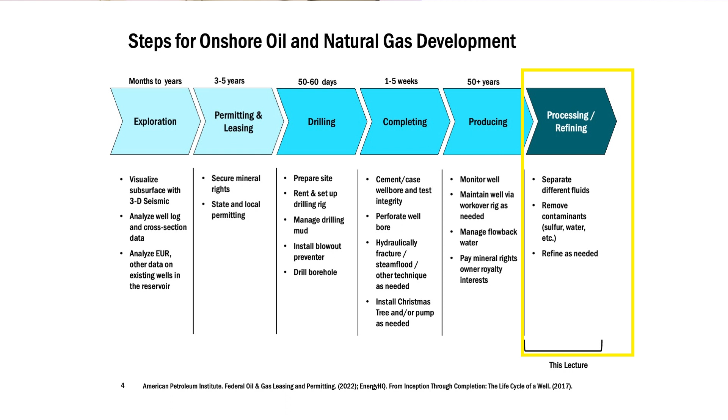You've seen this chart before, just to contextualize where we are today in this lecture - we're all the way down at the end. We're talking about now we've gotten the oil out of the ground - what do we do with it? How do we get it to the refineries? And how do we make it into the fuels that we use, especially in our transportation sector?

So a little bit of summary of things we're going to talk about today. We're going to talk about crude oil - it's not all the same, so I'll give you a sense of what the differences are, what terminology we use when we talk about crude oil. We're going to talk about trade and moving it around - we move a lot of oil around. It is one of the resources that is very much a global commodity, so we have global prices on oil, a lot of factors that go into our global prices and our global markets for oil, and so we'll talk about that.

But big picture, we move a lot of it around, and much of that transport is on water - we're moving it across oceans as we move our oil around. It doesn't come out of the ground in a very useful form, so we're going to talk about refining. The products that we primarily make in the US are gasoline - that's not true everywhere, so we'll talk about some of the differences in the products. Why do we use oil for transportation? It is a very high energy density, both from a volume standpoint and a mass standpoint.

When you're going to carry your fuel around with you like you do with transportation, energy density is important. This is why oil has really dominated our transportation fuel sector. It makes it very hard to dethrone, to move to something else.

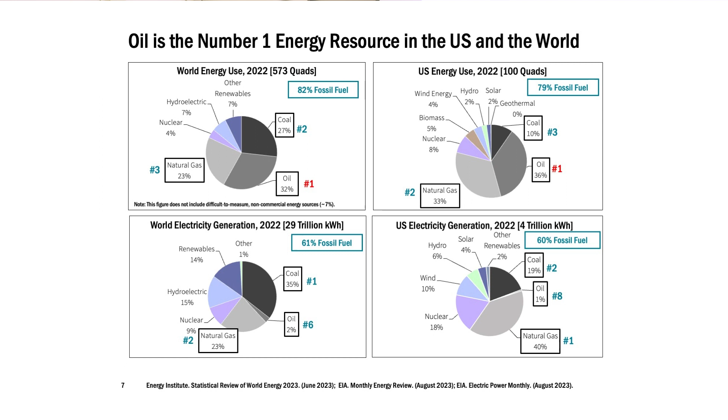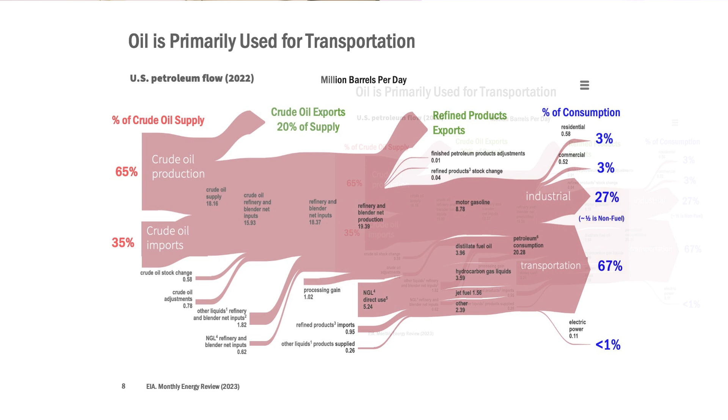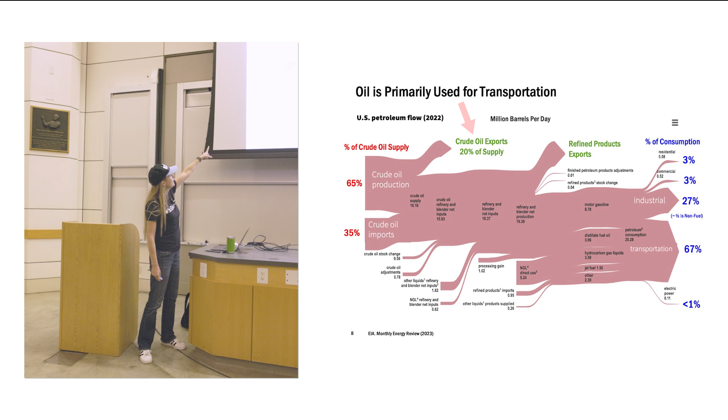First, looking at where we get our oil from, so our crude oil supply. We're going to talk more about this, but this picture has really changed with the horizontal drilling and hydraulic fracturing revolution. We used to import more like three-quarters of our oil, and now we're only importing about a third of our oil. And not only that, we're exporting quite a bit of oil.

We originally, for a long time, were not able to export crude oil—it wasn't allowed by our federal government. That changed in 2015. It was kind of like a deal when we were expanding some of the subsidies on renewables. The way some of the Democrats got the Republican Party to support that was to allow exporting of crude oil. For a long time it wasn't allowed because of energy security—this idea that we should keep our oil within our borders. But now we allow crude oil exports.

We've always allowed refined product exports, so that means things that are coming out after we've already made the gasoline or diesel—we export that. And those two wedges are actually bigger than our crude oil import wedge. So in just the last three years, we have become a net exporter of oil, crude oil plus products. It's a new landscape for the US. But you can see we also still use quite a bit of it here—just much more crude oil production is coming domestically than from foreign sources.

Then I want to show you the end, right? So three-quarters of it, or two-thirds of it, is really going to transportation. And then that industrial piece, which is almost another 30%, about half of that is fueling the refineries that are making the transportation fuels. So a big wedge is going to transportation, other industrial parts used for heating and some other processes, and it's also used for non-fuel purposes—oil goes into plastics and other commodities, so chemicals as well.

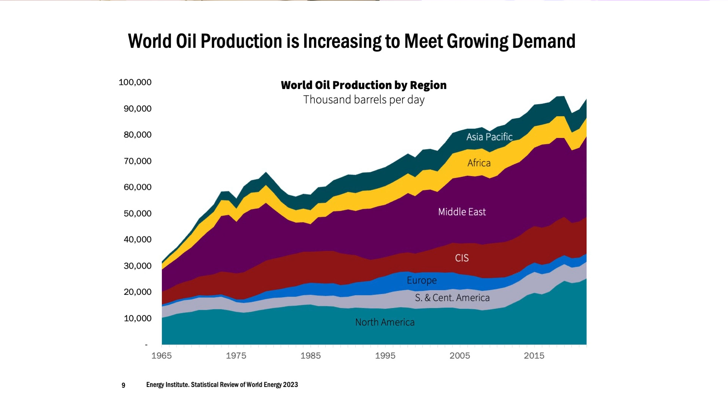This chart's not going to surprise you: world oil production is growing, and it's growing as demand grows. So where are those growth areas in production? You can see in this chart how production really took off in North America and the US with the horizontal drilling, hydraulic fracturing revolution. The Middle East very much dominates oil production, and there's not a lot of growth in other areas for production. So those are the two big regions of oil production today.

I would say projects in Alaska have a long history of controversy. ANWR is a reserve there. There's been a lot of pushback. There's a big oil reserve there. It's a very environmentally sensitive area, and it's actually a very challenging area to produce oil.

The Willow Project has some of those same challenges. Although this is now leased, there's still a question of whether it will actually be produced, and that depends a lot on oil demand and oil price. It's a little bit more challenging area, and that impacts the profit margins for producing from this site.

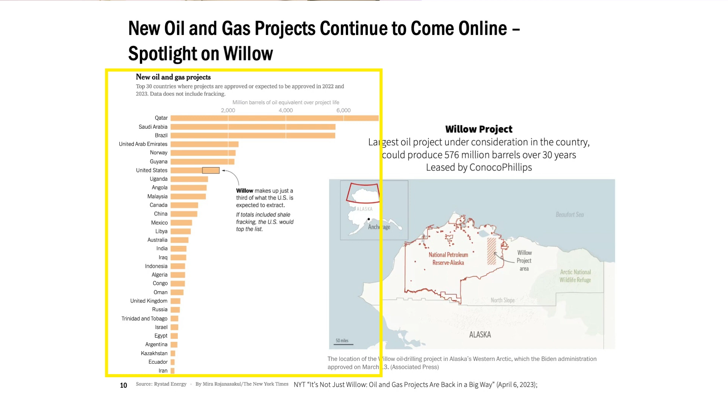So we've gone after more of those plays. It's a very different environment than it is in a lot of other countries. In the US, it is very much market-driven, commercial-driven. There's private ownership of minerals, and so there's a lot of incentive to go after those minerals with private mineral rights. In much of the rest of the world, those mineral rights are owned by the government, making it much more of a government-controlled industry than here in the US.

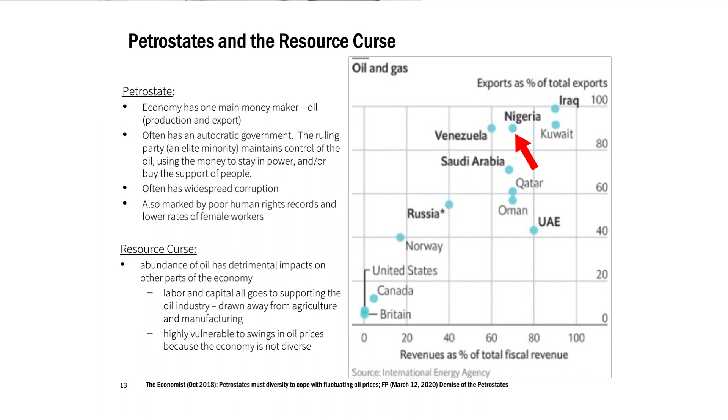This chart shows revenues in terms of exports, and it reveals that Nigeria is very dependent on oil exports for much of the country's revenue. A lot of that doesn't trickle down to the populace; it supports a wealthy few. This can be a challenge in terms of how equitable a society is, given this resource curse idea.

This is coming up a lot with oil companies that have operated in places like Nigeria, like Shell. This is a recent example in the news: they're trying to sell off their more polluting oil sites to reduce their carbon footprint. In Nigeria there's often a lot of flaring and oil leaks, so it tends to be a very polluting place for these multinationals to work.

Shell, for example, has sold off much of its assets in Nigeria to local producers. The unintended consequence is that these local producers don't have the money or resources to clean up, so the pollution has actually gotten worse. This is another impact of our use of oil as a fossil fuel.

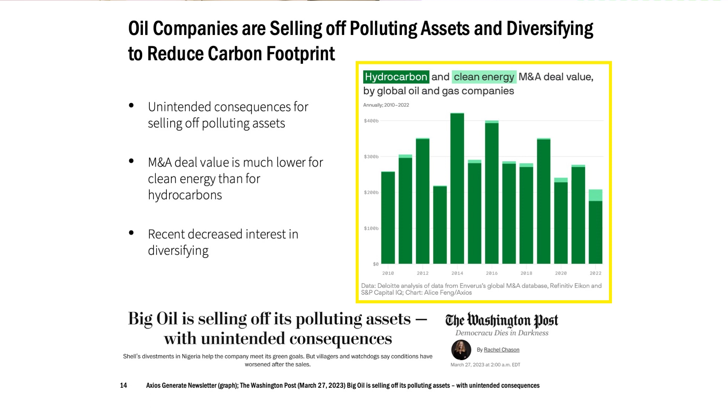The other thing going on, at least talked about with a lot of the big oil company multinationals, is this idea that they're investing in clean energy, trying to diversify and reduce their carbon footprint. This chart shows that it's still nowhere near the investment they're putting into their oil and gas assets. It's not surprising—that is what they are. They might talk about being energy companies, but they're really oil and gas companies. As long as we have demand for these products, they're going to see that's where a lot of the profits lie, where their expertise lies, and where a lot of their investment is going.

I wanted to bring up another complexity of oil before we get into the technology: oil's impact on climate change, and the attention some oil companies—ExxonMobil in particular—have gotten over the idea that they've known about climate change for a long time and tried to downplay it. New York State has done a lot of investigation into this. California has just recently sued oil companies, ExxonMobil being one of a whole list, with evidence that they've known about climate change for a long time and tried to downplay it so they could continue their oil business.

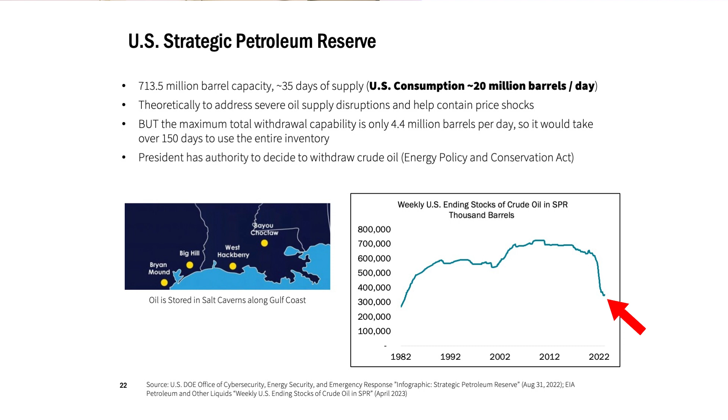And so we do see different federal administrations sometimes fill it up when the oil is cheap, and then they sell it when the oil is expensive. So it does work as kind of an arbitrage way of making some money off of that oil stored in these caverns. So you can see it's kind of at a lowish point in terms of how much we have in our Strategic Petroleum Reserve right now. Questions on that before we get into moving it around and how we make it into fuel?

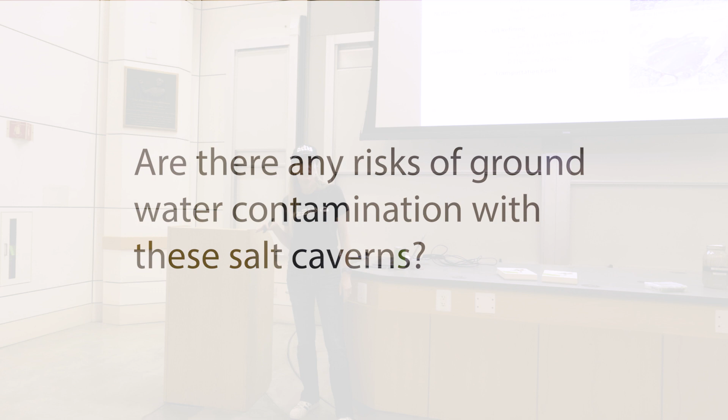Are there any risks of groundwater contamination with these salt caverns? I would say there's always risk. Salt caverns tend to be pretty airtight, but they have to be monitored because there's always risks of seepage or something like that. The biggest challenge we had with the salt caverns in the facility I was at, where we actually just stored salt water to make chlorine, is it mixing with other things stored in the neighboring caverns. You could sometimes get leakage across the caverns because you don't always store the same thing in one cavern. Sometimes you change out what you're storing there.

Are there any concerns of the oil getting contaminated within the salt cavern? No, it isn't a huge concern. You're going to refine that oil as you take it back out and process it. So the little bit of salt that might get in there isn't something they worry about.

Let's talk about oil sands and tar sands, and then we'll talk about moving oil around. So you've already heard a lot about how we drill and produce conventional oil or unconventional oil that's in oil shale, stuff that's liquid at room temperature. Much of the oil that's produced in Canada, for example, is oil sands or tar sands.

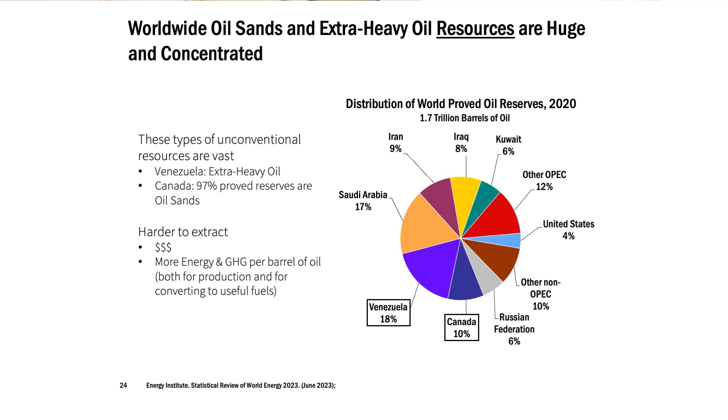Okay, so where is a lot of our heavy and oil sands and extra heavy oil resources? Much of them are in Venezuela and Canada. You know, a couple decades ago, they wouldn't even be considered proved oil reserves because if the oil price goes low enough, it's not cost effective to produce that oil because of all the extra stuff you have to do to it. California oil also can fall into this category.

There's two ways to get it out. Open pit mining, which is really you just clear the land, you clear the topsoil, you start digging out the sand and the oil that's mixed together. Then you got to heat it up to try to separate those things, and then you got to heat it up enough to make it into like a synthetic crude that you can at least pump somewhere or keep heated as you're pumping. So in that process, usually they use natural gas to provide a lot of the heat, so they have to pipe in natural gas to heat up that oil to make it into the Syncrude so they can move it around.

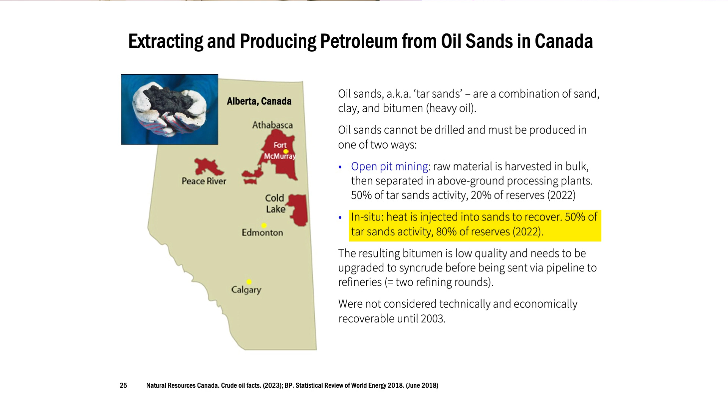In situ is where you're injecting the heat directly into the sands and trying to make it flow there, and then you pump it out kind of like you do with conventional oil because you've already heated it up. That's kind of what we do here in California with the heavy oil resources. We're putting steam into the ground, heating it up so it'll flow, and then we pump it out like conventional oil.

It's causing a lot of environmental challenges in terms of oil sands. So as you can imagine, it's pretty land and water impactful where you have to clear the forest, clear the topsoil, and dig out the oil in Canada to get to the oil sands. And it's over massive areas of Alberta, for example. It's got a lot of water requirements, so you're making steam in order to get that oil to flow. And so you get a lot of gunky water as you're doing this process. And so they have a lot of these big wastewater tailing ponds that they have to do something with.

In terms of the energy intensity, to produce 5 barrels of oil, you need to burn a barrel of oil. And so that's why I'm saying this is very energy intensive oil. That means it's very greenhouse gas emission intensive because it has all the requirements for heat to make that oil flow.

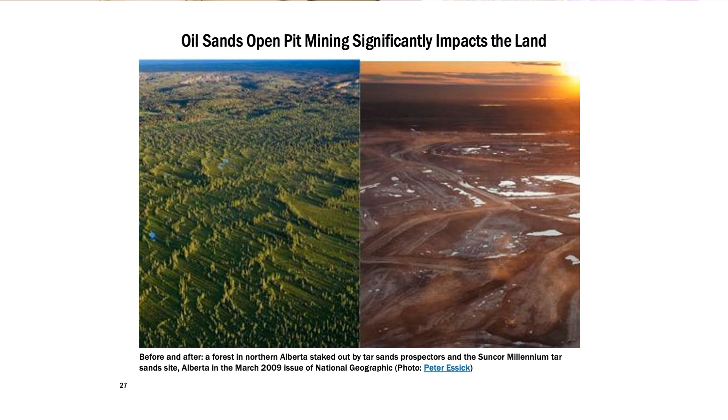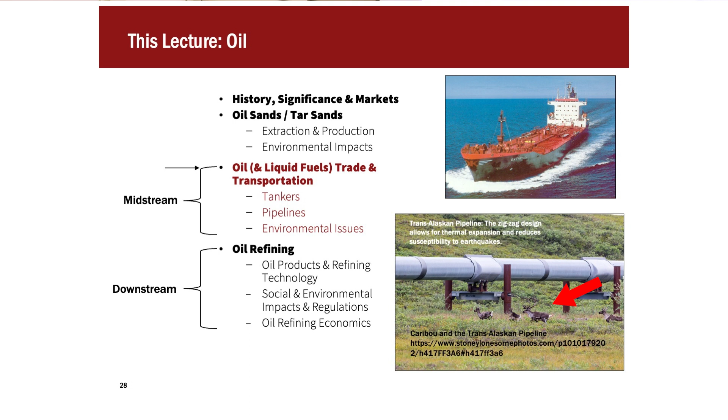All right, let's move on to transportation of our oil. There's two main ways that we move our oil around: tanker, so you can see that up in the upper corner, and pipeline. So tanker obviously over water, pipeline over land. I like to show this picture of this pipeline in Alaska. It was intentionally made elevated so it wouldn't impede the migration of the caribou. And so you can see the caribou are able to go under this pipeline.

Pipeline infrastructure in Alaska can be very challenging, and there's a lot of inspections going on because as the permafrost melts, you can get shifts in these pipelines, and it can make it more prone to leakage. So just like we see challenges with roads in Alaska, we see challenges with pipelines because of the shifting ground as the permafrost melts.

I said this already, but just to drive home the point that oil is a global commodity. We move it around. And much of what we do is we move the crude oil around. So we get the crude oil out of the ground, we move it closer to the markets where it's going to be sold, then we refine it near those markets to make the fuels that are in demand in those markets.

How big are these tankers? Growing up in Houston, we had a little boat. We would go out and go up the Houston Ship Channel next to these big tankers, they're coming in all the time. You could see dolphins riding little waves next to the tankers. But to give you a sense of how big some of these are, this shows one next to some buildings - one of the largest tankers ever built.

These are very large tankers, especially for the crude oil tankers moving it across the ocean. You can see there's different categories. These crude oil ones, the ultra-large crude carriers and very large crude carriers, go across the oceans and are called dirty tankers because they haven't been refined yet - it's the crude oil we've gotten out of the ground.

The challenge with those is that they can't go through some of the canals. So for Suez or Panama, if you want to go through, you've got to have smaller tankers. If you don't want to go all the way around South America or Africa, you have to have smaller tankers. That's where we see some of these middle ones - the Panamax is called Panamax because it can make it through the Panama Canal.

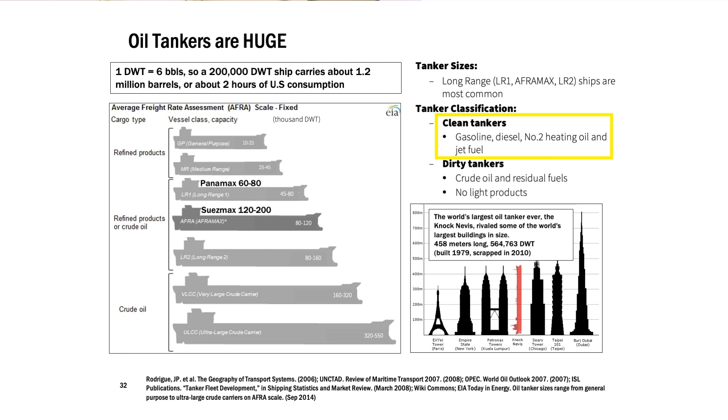Those can either be for crude oil or refined products - you don't see the same on the same tanker. Often it's either crude oil or a bunch of different refined products in its tank holds. The refined product ones are often smaller because you're not going as far - we're moving that regionally rather than globally like we do crude oil. Those are called clean tankers, so that's where you'll have your refined products.

A risk with moving our oil around, obviously, is oil spills. One of the most famous and impactful tanker spills was the Exxon Valdez in Alaska in 1989. It was impactful for a number of reasons. One is this is a very environmentally sensitive area, so we saw a lot of impact on the wildlife, the people, the fish, whales, everything else in that area.

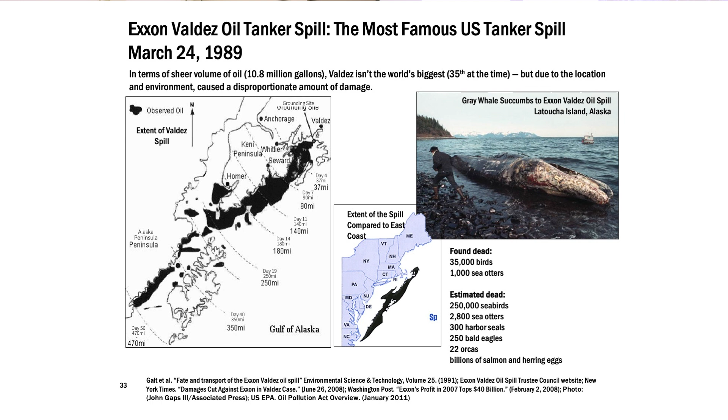It's also a very challenging place to clean up oil because it's in Alaska, and that also made it very challenging. Another way it was impactful is it changed the rules about oil tankers. At the time, these were what were called single hull tankers, meaning the container for holding the oil was the outside of the boat, of the tanker. So if you got a puncture, you were going to drain that whole cavity.

What we now require, and if you saw the video they talked about this, is double-hulled tankers. That means there's a space, a gap, between the outside of the tanker and the hold that's actually holding the oil inside. This dramatically reduces the risk of tanker oil spills and was prompted by the Exxon Valdez spill and the passing of the Oil Pollution Act, where the US basically said we're not going to allow any tankers to come to our ports unless they're double-hulled. That really prompted a change in the tanker industry.

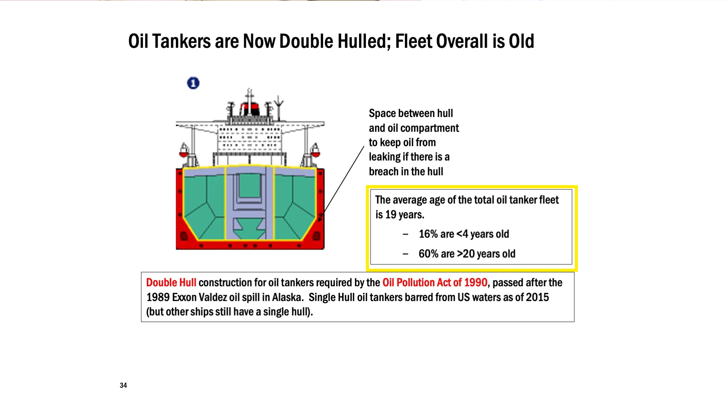Much of the tankers in use today are fairly old. These aren't replaced often and quickly, so many of them are 20 years or more older. You can imagine that impacts the engines, how efficiently they run, things like that in some of these old tankers.

So the good news is our global oil tanker spillage volume has come down over time. It's gotten cleaner and cleaner over time. And this is pretty dramatic considering that over the same period of time, the amount of oil we traded doubled. So as we're moving more oil around, we're spilling less of it. This is a good news story that we've gotten better at this. So about 0.001% of the global oil transported is spilled.

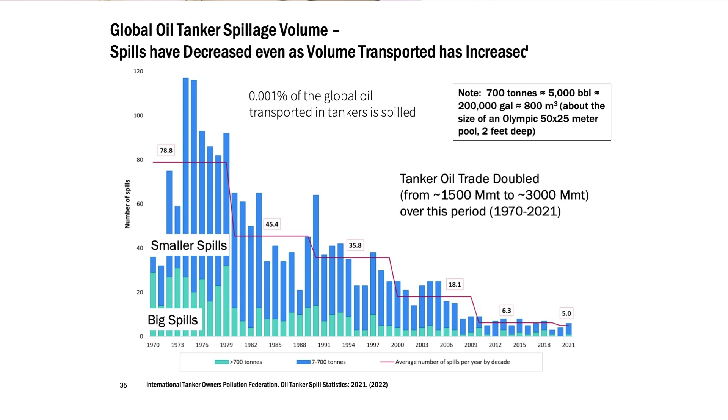Still can be very impactful locally, right? It's a risk of using oil. How do we clean it up?

So this is just giving you some ideas of the cleanup process. Oil is lighter than water, so it will float-ish. The first thing we do is put out booms to try to collect it. Sometimes we try to burn it off the top of the water, but depending on how rough the water is, it's going to start mixing, and it can get pretty challenging. You can put surfactants in there - surfactant's just a soap that will naturally trap the oil - and then try to clean up the surfactant plus the oil. There's also bacteria that they put out sometimes that eats oil to try to clean it up.

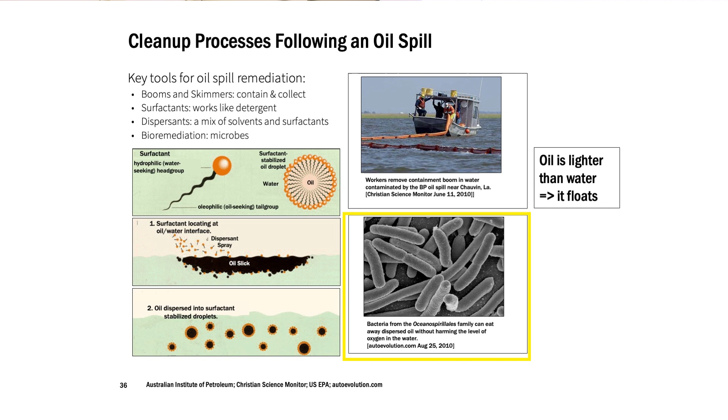The big thing is the sooner you act, the better. You act right away, that's the best. But you can only do so much - you're not going to get 100% of the oil back. So it's going to impact the local environment, wash up on shore, things like that.

If there's an oil spill in a place with cold water, would that be different than an oil spill in a place with warm water? Yeah, well, that's just one of the factors, because it can depend on how rough it is. In terms of cleanup, part of the challenge with Alaska was getting people and supplies to such a remote location. Won't the oil hold together better with more cold water? It will be thicker - it should stay thicker - but it also depends on the quality of that oil. If it's light sweet, it won't get as thick as the heavy. So it depends some on the quality of oil as well as the temperature.

So the other way we move oil around is by pipeline. This is really when we have the pipeline available and we're moving it over land - we're going to move it by pipeline. It's the cheapest way to move our oil around if the infrastructure exists. If the infrastructure doesn't exist, then we're moving it by truck or train, which is a lot more expensive. In the US, we have a pretty extensive pipeline network, both for crude oil and for products, so domestically we're getting much of our oil to our refineries by pipeline.

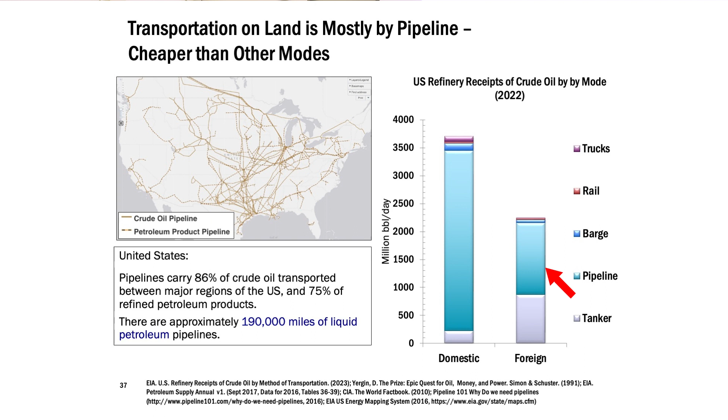Even for foreign oil, a lot of that pipeline movement is from Canada - the oil we're getting from Canada is by pipeline, while other countries are getting it by tanker. There are some of the same risks with pipelines. We see pipeline ruptures, breaks in pipelines that can cause oil spills in natural environments or in communities. There are lots of examples of oil pipelines busting and impacting communities, and some of the same challenges with cleaning up that oil from those spills.

I don't have the data, but pipeline spills haven't changed a whole lot. We saw tanker spills come down dramatically, but pipeline spills aren't going up, aren't going down either - they're kind of holding steady in terms of the number of pipeline spills we have.

Okay, so refining capacity in the world. Big picture, what I want you to take from this is a lot of the refining capacity is where the markets are. So we are refining our oil where the demand for that oil is, or very close to it. We don't move the refined products as far. And so we've got a lot of refining capacity in Asia Pacific, a lot in North America, much less in places like the Middle East, where they're mostly exporting that oil to other markets.

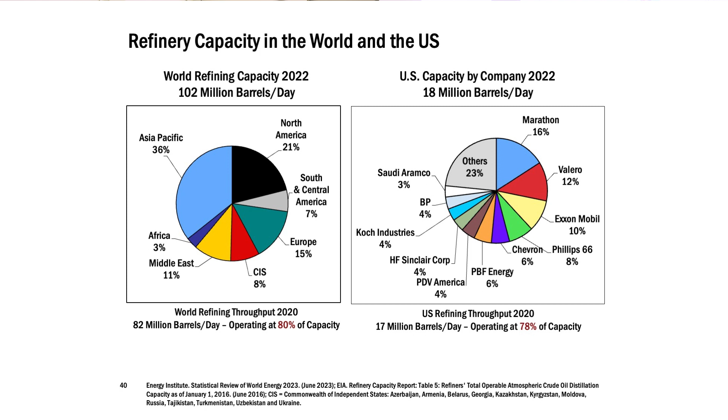In terms of the US, here I've broken it down by company. In terms of refining capacity, a lot of times people are surprised to see who kind of leads this, because it's not necessarily who you associate with who you're buying gasoline from at the pump. So a lot of our oil companies are refining only. Marathon, Valero, these only do refining. And then ExxonMobil, Chevron, they do all of it. They do the upstream, the midstream, and the downstream. They do refining as well. And so there are different parts, different oil companies, whether they're vertically integrated or just focusing on refining.

I worked at a refinery for a summer in Baton Rouge, Louisiana, at the ExxonMobil refinery. And one of the things to keep in mind about refineries is, unlike the upstream, refining is a very tight margins business. So what does that mean? They're squeezed between the price of the crude oil and the price of gasoline. So they're only making pennies on the gallon, and so it has to be a volume business to make money. They're not making much on each gallon, but they are producing so much efficiently that they are able to make profit.

In the oil industry, they kind of always talked about the upstream as where the money is. You know, you're finding it and you're getting crude oil and stuff like that. Refining is very tight margin, part of the downstream of oil companies. So you have to be very efficient to make money in the refining area.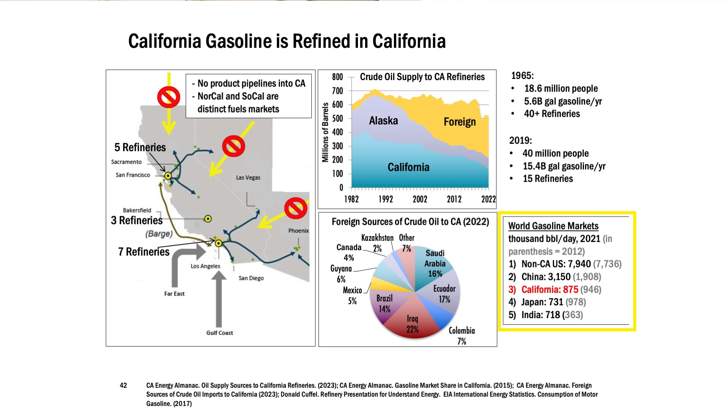And why do we talk about California? California is a huge gasoline market. We're a large economy, we have a lot of people, and we move around a lot. So if California was a country, we would be number 3 in terms of world gasoline markets, after the rest of the United States and China. So we are a huge gasoline market.

Our fuels are a little different. Because of the air quality challenges we have in California, we have a lot more restrictions, and so we force those refineries to make cleaner, cleaner burning fuels. They call them boutique fuels because they have to make a special blend just for California to meet our air quality and air pollution standards. So it drives up the cost—it requires more processing for our fuels.

The other challenge we see is if there is a challenge at one of these refineries—we've seen a safety challenge or something where a refinery shuts down—that dramatically increases prices for gasoline in California, because it's really hard to get that gasoline in from other refining capacity, like in the Gulf Coast.

So back to the big picture. Let's talk about oil and how we talk about oil. There's kind of three labels, categories, when you talk about crude oil: the gravity of the oil—how thick it is—the sulfur content, and where it's from. And that's how we label our oil.

So for gravity, if it's light, it has a high gravity—that's really runny, nice, high quality oil. If it's low or heavy, that's thick—that's the stuff we're getting out of Bakersfield, right? That's the stuff that barely flows. So that's low quality and tends to be cheaper—cheaper to get the heavy than the light.

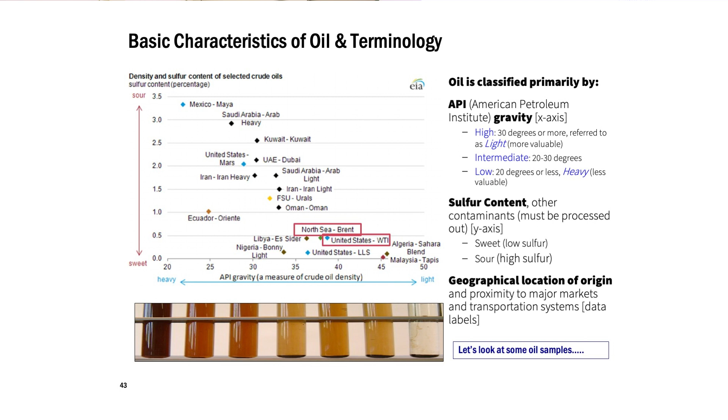All right, so the refineries are processing that into the fuels that we want. And what are they doing? Oil is this mixture of all sorts of different things, and they're making it into products that are basically based on the length of the hydrocarbons that we want for our different fuels.

Refineries are made to process certain types of crude oil. A simple refinery might only be able to process the light sweet stuff, which is fairly easy. Other refineries may be set up to process the heavy, sour crude oils, and they can usually only operate in a certain range of crude oil that you're putting into the refinery. So what do they do? They call this crude blending. This is an actual example from Valero of the sulfur content and the API gravity of all the different crudes that they're buying.

They have to blend crude oils together to fit within the specifications their refinery can process, because each refinery has a mix it's set up to operate on. If you have a refinery that only operates on light sweet crude and you want to start taking in heavy sour crude, you have to make a lot of changes to the equipment. It doesn't just switch over—it takes a lot of capital investment. So usually refineries stay within their box in terms of crude type, buying stuff outside their box and blending it depending on the price. Oil is actually traded on its way here—they're buying and selling it while it's on the tanker heading to California. The market stays ongoing until you're actually offloading it into your refinery.

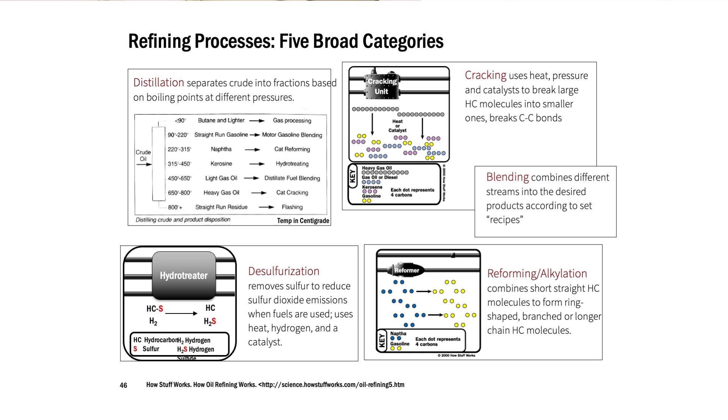Let's go deeper into each of these, starting with distillation. What we're doing is heating up the crude oil and allowing it to separate by the vapor pressure of the different hydrocarbon chains in that oil. The really light stuff ends up at the top of the distillation tower, and the really heavy, thick hydrocarbons end up at the bottom—that's what I meant by the bottom of the barrel, this really heavy, thick stuff that goes into asphalt and often bunker fuel for marine purposes. Gasoline is up towards the top, jet fuel is in the middle, and diesel is a bit heavier cut of the distillation tower.

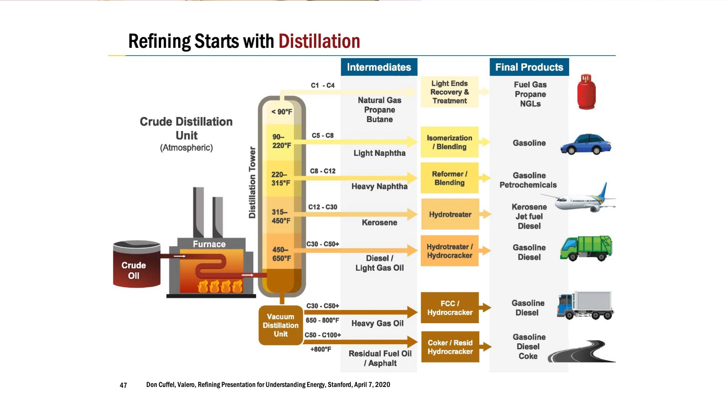That's the first process. Some refineries are just this—the simplest refinery just does distillation. You separate it out, and whatever percentage of gasoline or diesel the crude oil gives you is what you get, without any further processing. These are fairly simple to set up, so sometimes we see them in places like Nigeria, for example, where there's a lot of theft of crude oil—very simple distillation refineries set up just to get fuels from that crude oil.

The more complicated refineries, which are most of ours here in the US—big refineries like on the Gulf Coast and here in California—tend to have a lot more steps of refining. The next step is cracking. There are different ways to do it, with thermal cracking or using catalysts to make it more efficient. The big idea is you're taking big hydrocarbons that are less valuable and breaking them apart, sometimes adding hydrogen to bring them up to the quality of gasoline, which is mostly what we want here in the US—taking the thick stuff and making it into lighter products.

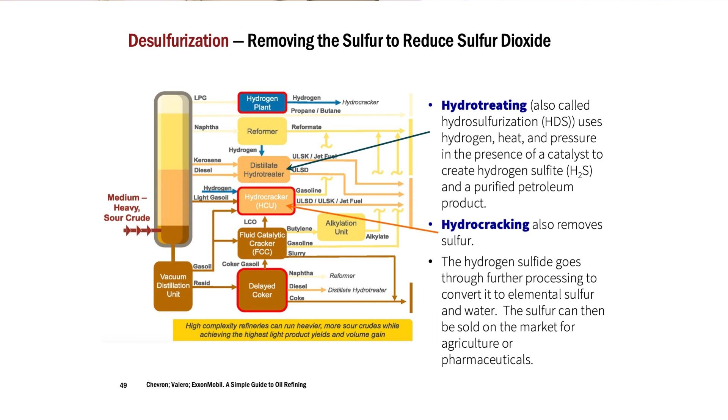Desulfurization happens in different ways—some with the cracking, some done separately. You want the sulfur out because when you burn it, it creates sulfur dioxide and acid rain, and we have restrictions on how much sulfur our fuels can have, so you've got to take it out. Then alkylation and the reformer put some molecules back together in different forms, often to increase the octane of the fuel. Again, it's all about making high quality fuel, usually gasoline, here in the US.

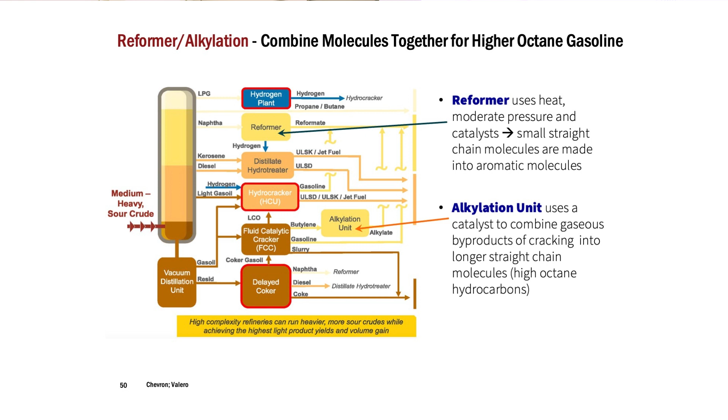Other places like Europe would be more focused on making diesel. So most of the refinery products in the US are gasoline. About half of what we're making in our refineries is going to gasoline. This is just kind of a trivia or a fun fact.

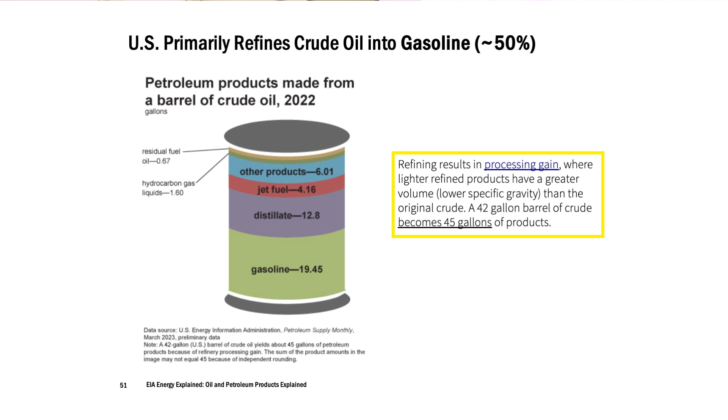You actually get more gallons of product out than crude oil you put in. This is called processing gain. That's just because you're making it lighter by breaking them apart. You do add some hydrogen too, which also adds to the volume. So 42 gallons going in becomes 45 gallons of product coming out. This comes up if you see the difference between production and consumption. It's because it's a little bit different volume when you look at those numbers.

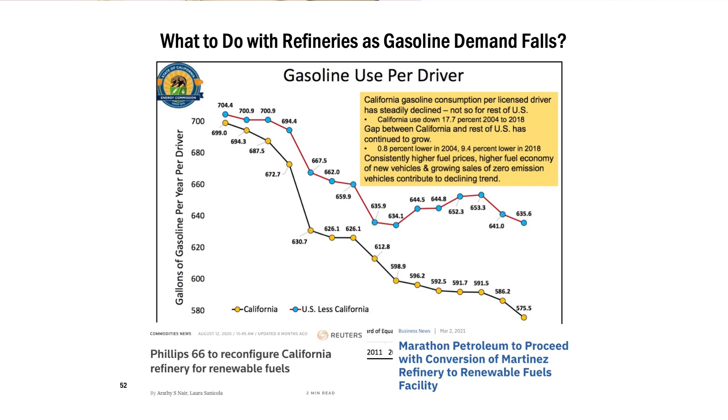Okay, so what are the changes that are happening? Let's talk about some of the challenges and the changes that are happening with our fuels. One of them is gasoline use per driver in California is declining pretty quickly, and we're actually seeing it decline in the US post-pandemic. Miles have come back up, but gasoline usage is declining. And we'll start to see that more and more as there's electric vehicles, more efficient vehicles, other options. And so this is a challenge for those refineries that are volume related in terms of making profit margins.

So what is happening here in California? We are starting to see some of our refineries switch from being just for gasoline and diesel from oil to more renewable fuels. We'll talk more about renewable fuels when we get to biomass in the biofuels lecture. But these are basically using biomass resources to make diesel. When they talk about renewable fuels, they're really talking about diesel, because we can make a diesel that looks just like oil diesel, but it's made from biomass resources.

And so our refineries are changing their processes to make more of these renewable fuels. A lot of that is driven by demand, and a lot of it's driven by policy in California, because we have a low carbon fuel standard that's driving down the carbon intensity of our fuels. So this is something we'll see going forward.

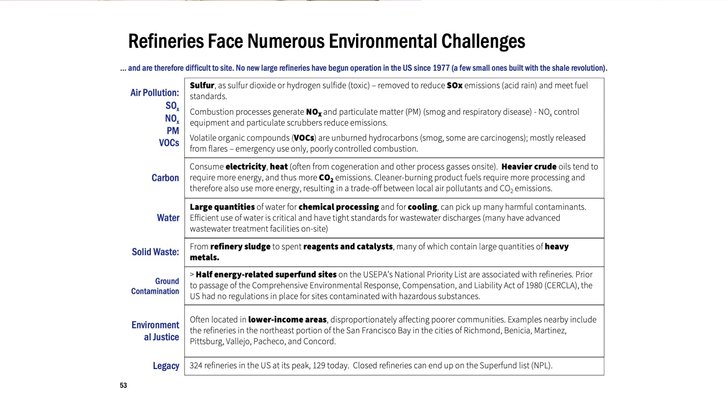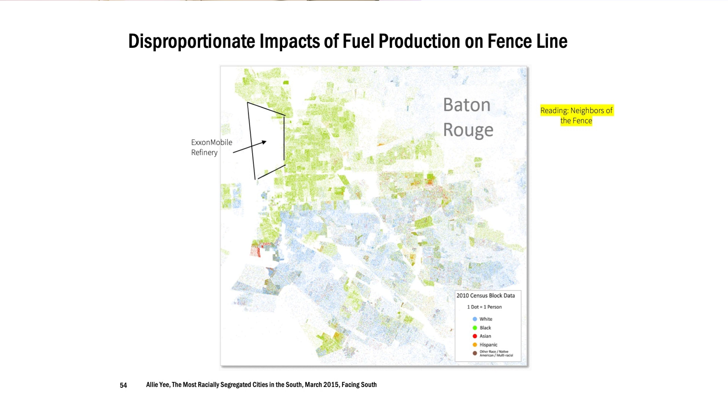I mentioned a little bit fence line communities. Fence line communities that we see next to big industrial sites like refineries, it is a challenge for the communities, and it is a challenge for the refineries themselves. So I'm showing you an example. This is the refinery I worked a summer at in Baton Rouge, where it is a predominantly black neighborhood where the refinery is located, and you can see the very Caucasian white neighborhood away from the refinery. This is right in the middle of Baton Rouge, right next to the river. You can see the Mississippi River going through there.

And this area is where Exxon has been trying to buy up land to create a green space between the community and the refinery. And so there's obviously lots of challenges. If you read that article, people don't want to sell their land, or they've always lived there, that's their home. The challenge for the refinery is they want a buffer. If something happens, they want time to respond before it impacts people that are living on their fence line. And so it becomes this point of tension, and we do see elevated health impacts along fence lines of places like refineries.

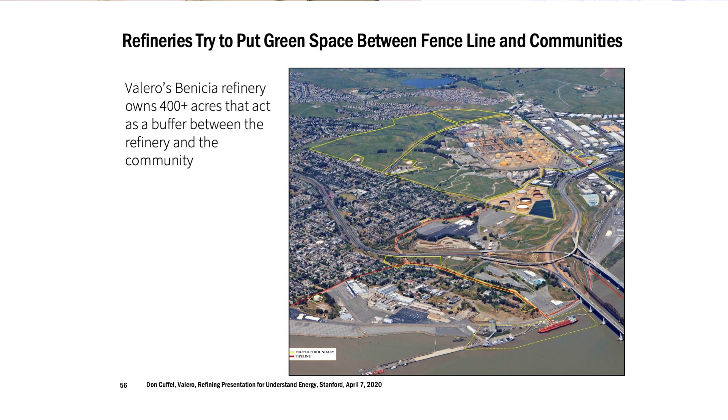More locally, this is Valero. They have a green space around the refinery, but you can see it's not that far to the community. And we do see community impacts. Oil spills are pretty obvious ones, but even most recently, they've found that Valero has been releasing benzene, which is carcinogenic, at levels that exceed allowed levels for 15 plus years. And so this does disproportionately impact those fence line communities. So it's one of the challenges.